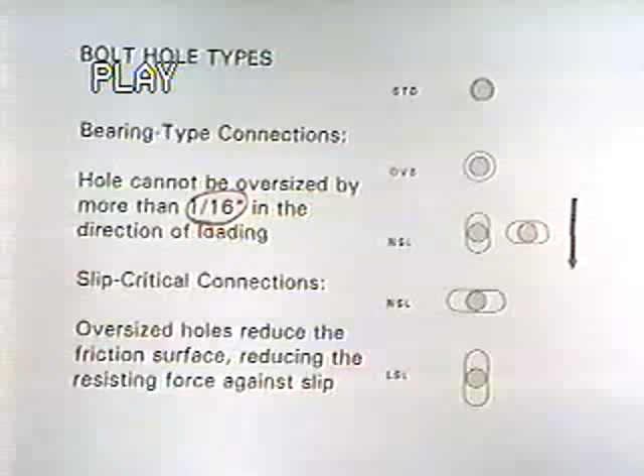In the connection. And so you'll see in the tables that for slip-critical connections, the bolt strengths are given according to the different hole types. Usually what they do is on these problems, they give you standard holes, and you don't have to worry about a lot of this.

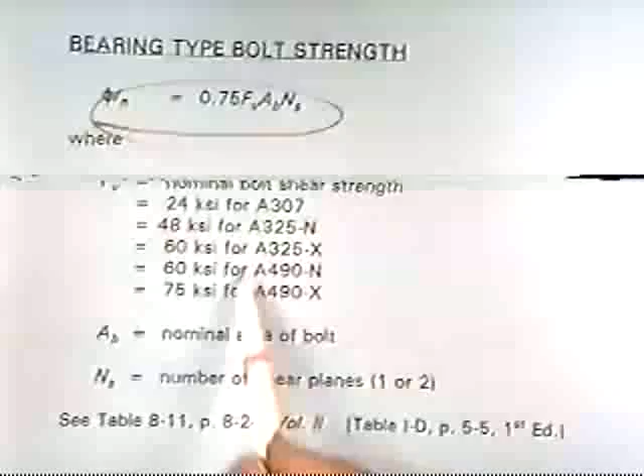The bearing type bolt strength, where we're assuming that we get slippage in the connection, is given by this equation. It's all defined here below. But again, we pick all the values out for the various bolt diameters by a table. And don't waste your time using this equation. Slip critical,

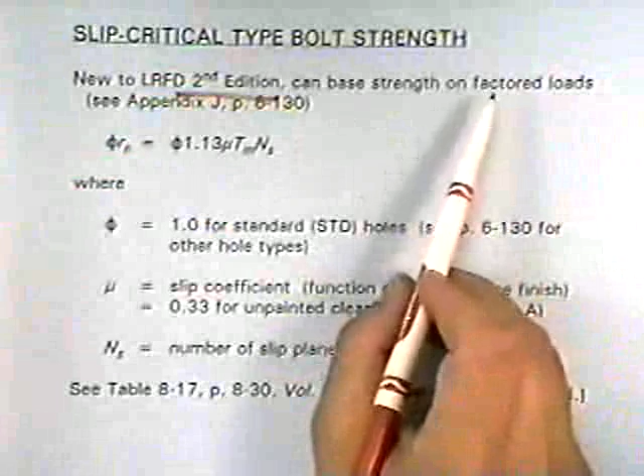it has other tables. What's new in the second edition is the fact that you can now base the design on factored loads. With slip critical bolts, in the past you'd base the design on service loads because that's where you didn't want the slippage. Again, you didn't really care if the joint slipped at the maximum ultimate load. This is the equation to calculate the strength for a single bolt, but again, it's given in a table.

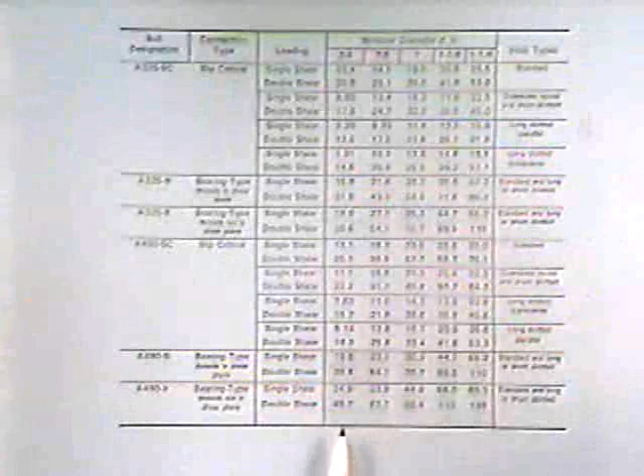On the next page, what I've given you is a table that kind of summarizes a series of tables that are in the specifications. For the second edition of the LRFD specs, it's in volume 2. It's in that second volume. But again, note that for all the values, they have single shear and double shear. And note that the values are just double for the double shear, which would make sense. And here I've given you it for various bolt diameters.

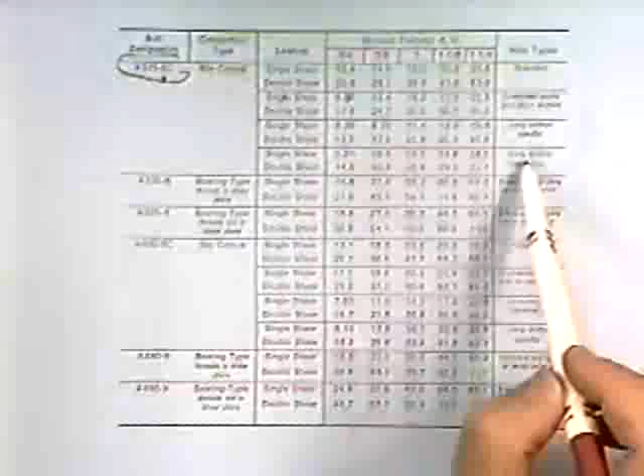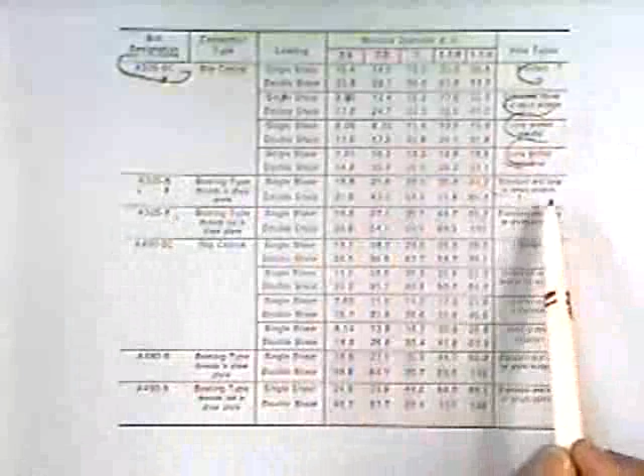Again, note for the slip critical bolts that they give values for the different types of holes that you can have. When you get into the bearing type, the N and X's, then it's just the standard or the short slotted that is perpendicular to the line of action. So they won't let you use the other kinds? Yeah, you can't have

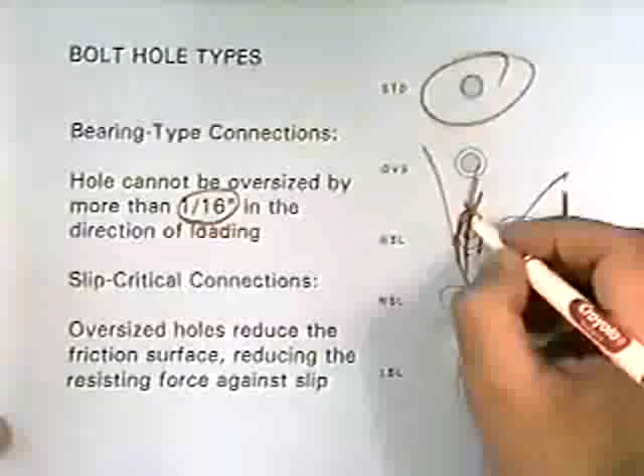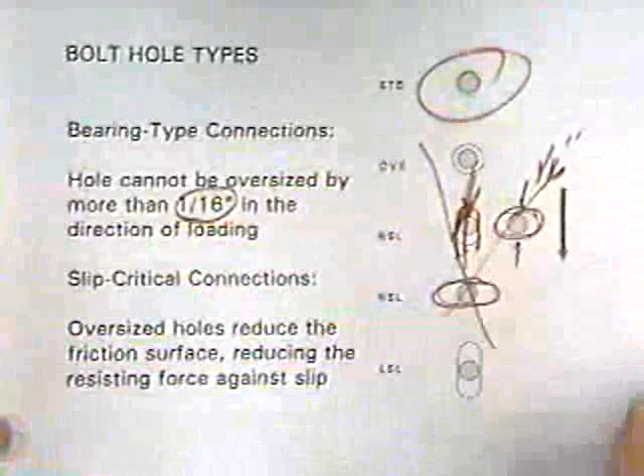going back. You can't have a bolt in bearing with a load that's parallel with the longitudinal axis of the oversized hole, because it's just going to slip right down, or actually the hole slips down right off the bat. Okay, you can only have this or this in bearing, but the oversized can only be a max of a 1/16 of an inch. Whereas in slip critical, because it's getting clamped together, you can have the various orientations of the hole.

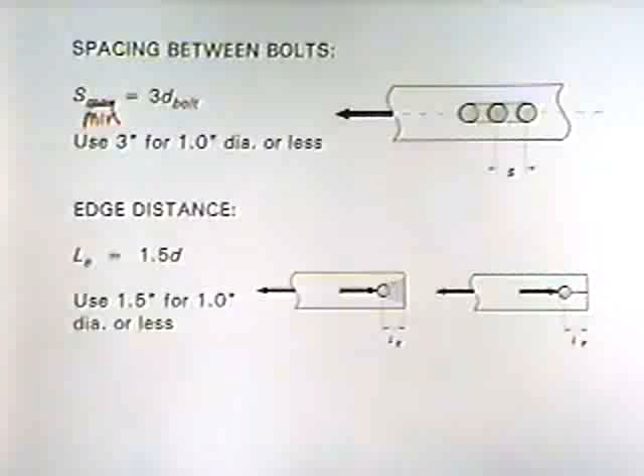You have to watch out for bolt spacing. You don't want the bolts too close together, otherwise they kind of interfere with one another. That should be the minimum bolt spacing. It can't be any closer than 3 times the diameter of the bolt, but typically you use a standard dimension of 3 inches. Edge distance, to keep it from pulling out the edge of the member, 1.5 times the diameter, or 1.5 inches for 1 inch or less diameter bolts.

Now this type of failure, we call it a tear-out failure. Now anybody, I think I see in the front a 3-ring binder notebook. Okay, that failure is similar to taking a page and yanking on it and it tears out. Okay, you know, on notebook pages, we got these little reinforcer tabs, those little donuts that we can put on that will correct the problem. Here we don't have that. You got to make sure you got adequate spacing.

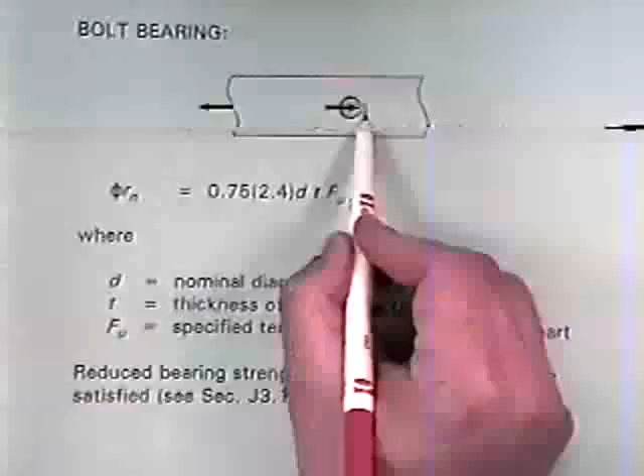Another thing you have to worry about with bearing bolts is the bearing of the bolt against the plate. It'll cause a high compressive force to develop here, and you'll get yielding, and the bolt will begin to plow through the plate. The strength to prevent that is defined by this equation here, where D is the diameter of the bolt, actual diameter. You don't have to add like a 1/16 or an 1/8. T is the thickness of the plate that you're checking. Fu is the ultimate or tensile strength of the plate material.

Looking at an example, let's say we have this simple lap splice where we're lapping two 1/2" by 6" plates together. We're going to use 4 bolts. Okay, because there's only one plane in the connection, the bolts are going to be in single shear. We're going to use A325N bolts with standard holes. They're 7/8 inch diameter. We're using A36 steel.

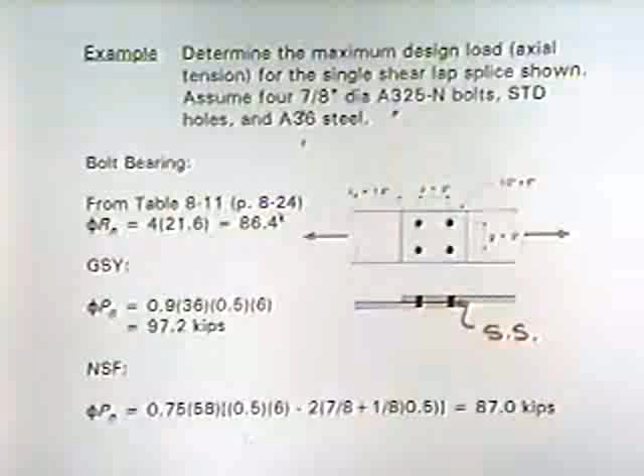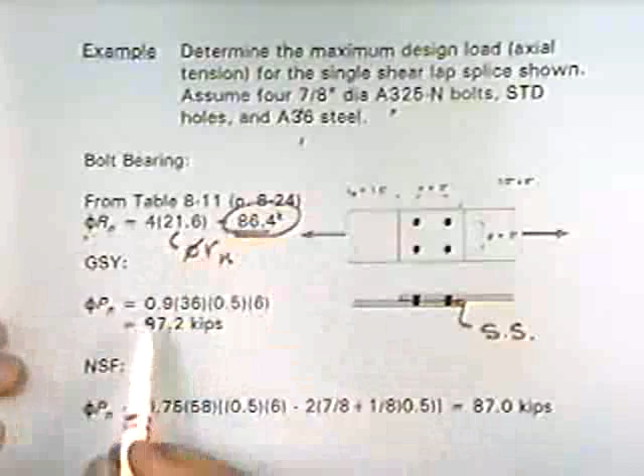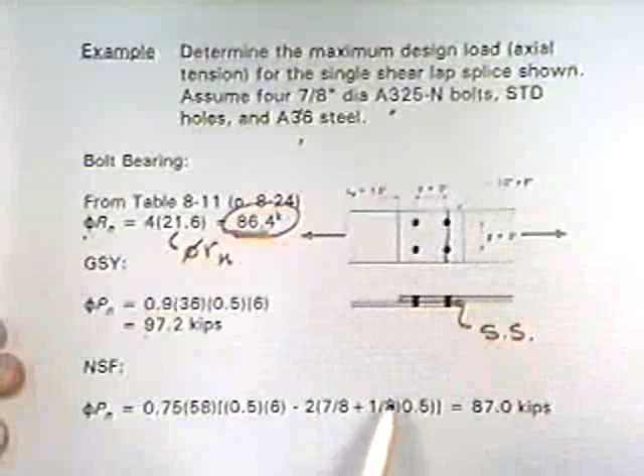Okay, from the table, you can also pick this off the table that I gave you, the strength of a single bolt is 21.6 kips. You have 4 of them, so the total strength of the connection based on the bolts is 86.4 kips. Gross section yielding of the plate, again, it's a tension member. Running through those numbers, which we've seen before, it's 97 kips. Net section fracture, again, what can happen is it can fracture through these 2 bolt holes. Again, like we saw in the tension member section, running through that calculation, it's 87 kips.

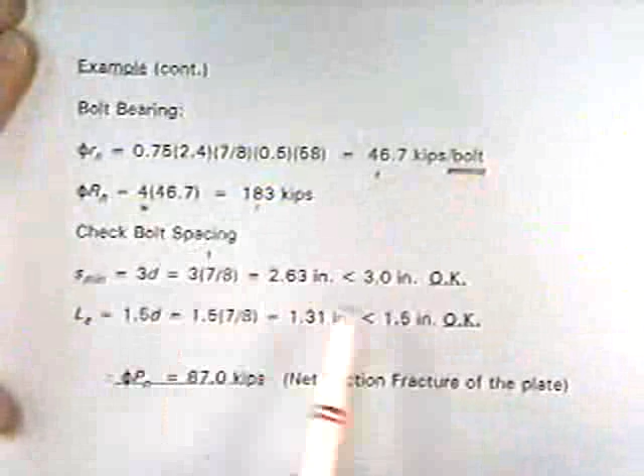Looking at bolt bearing for a single bolt, running through the formula we saw 2 pages previously, it's about 47 kips, but it's per bolt, so we have 4 bolts, so it's 183. Just a quick check on the spacing, everything's adequate there. And so what happens is the lowest value we get from everything we checked is 87 kips, and that was net section fracture of the plate. So that is what controls the design.

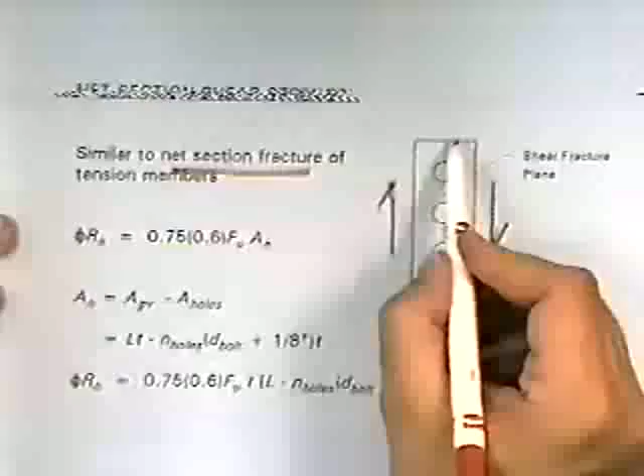When we get into connection design, you'll see that this is similar to block shear that we looked at, but we can also have a net section fracture of a member or connection. And now, because it's shear, the forces are going like this. What happens is that the failure occurs through the bolt holes, but parallel with the shear force. And that's calculated similar to net section fracture, where we take the gross area and deduct out the area of the holes. Typically, you don't have any staggers, so you don't have to worry about that. But, again, then the strength is given by the net area times FU, because it's a fracture, 0.6 because it's shear, and a reduction of 0.75.

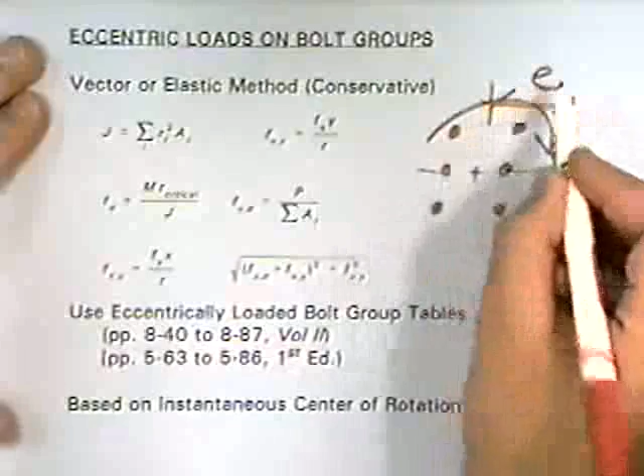Sometimes what happens is that we'll load bolts such that we'll have a bolt pattern or grouping where the force doesn't go through the centroid of the bolt group, and when that happens, not only are the bolts subject to shear, but they're also subject to a torque due to the eccentricity. When that occurs, you can use 2 methods. One is called the vector or elastic method. It turns out to be conservative, but it's not really correct, and it's given by this.

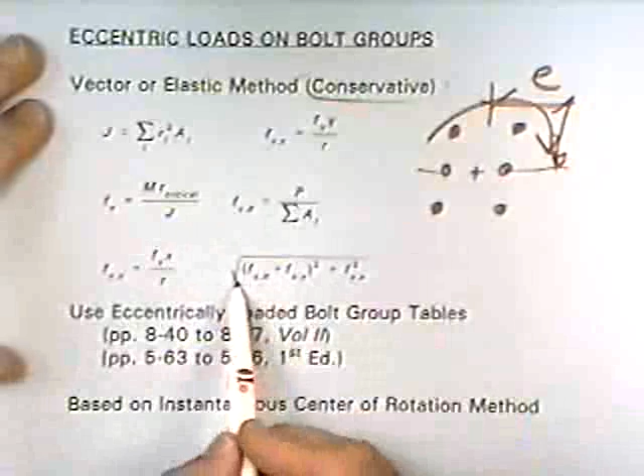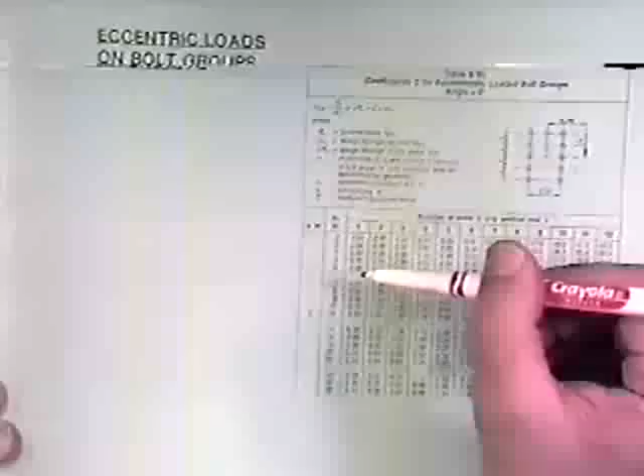You can go into some of the example problems that we set up in those books and look at it. I think you went over something like this previously with Dr. Lowery. They do give you tables, though, that allow you to calculate the strength directly, and I referenced that for both the second and first edition. But it's based on a different method of calculation. I'm not going to show you that, but it's called the instantaneous center of rotation method, and it's actually what happens in the connection. The tables look like this. A little hard to figure out to begin with, but it's easier to look at an example on the next page.

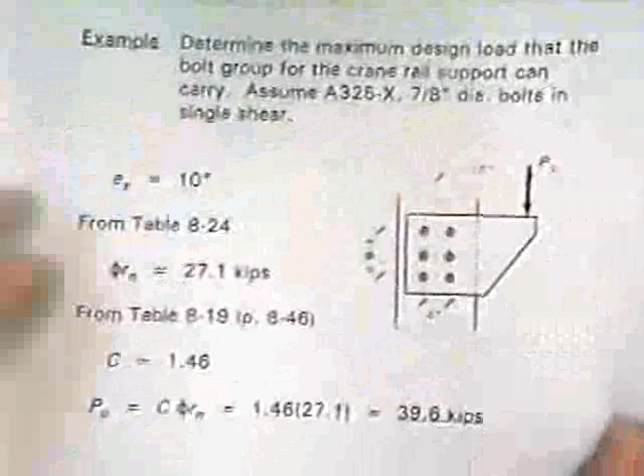Say we have this connection. It'll be typical of some bracket that supports some type of crane rail. Say we've got A325X 7/8 diameter bolts. It's going to be in single shear. We've got 6 bolts arranged like so. Should be equal spacing, although I don't think it is the way it printed out. We want to know what the design capacity is. Okay, from the table, the shear strength of a single bolt is 27.1 kips.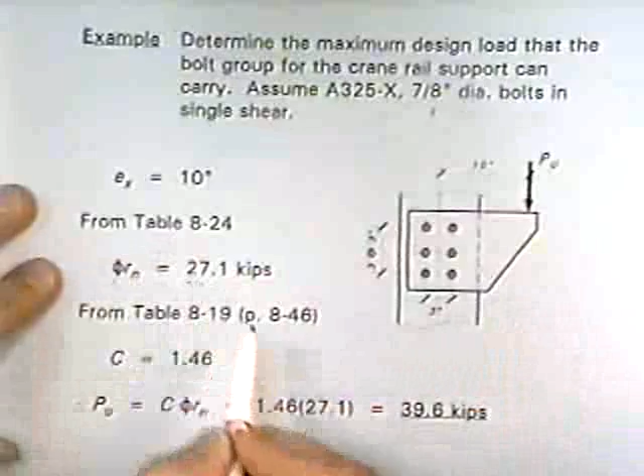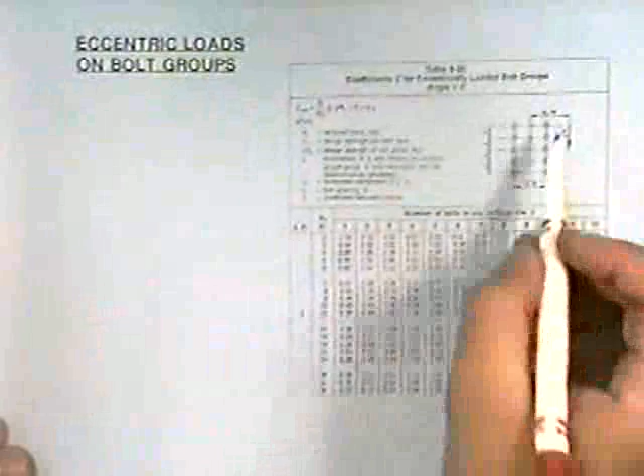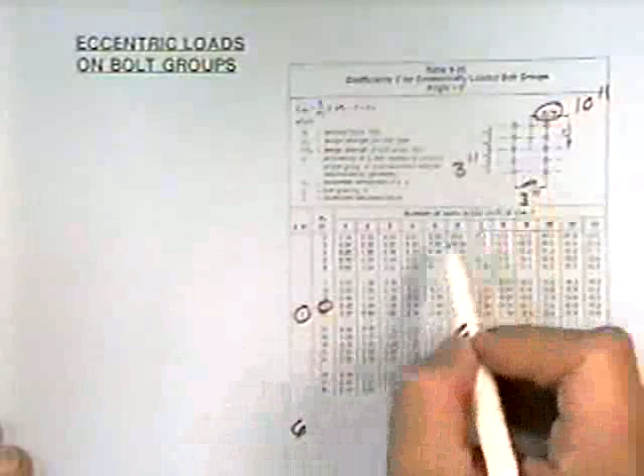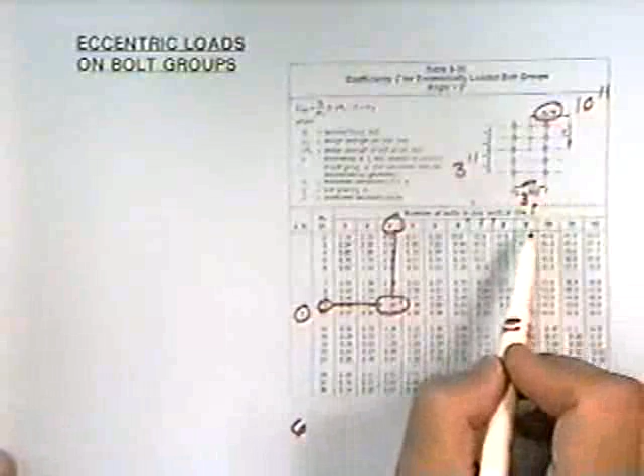But now we go to that table, and there's a series of tables, but we pick out the one that looks closest to our connection. And we need to go in with, by the problem definition, an eccentricity of 10 inches. The spacing between our bolts was 3 inches. Actually, I picked off the wrong one here, so it's not going to work, but we had 3 inches here. What you do is you find your eccentricity, it's 10, the spacing is 3, you also have another group of numbers for a spacing of 6 inches, and then the number of bolts in one vertical row. For our problem we had 3, so you come in and pick off a value. For this table, which is wrong because the spacing between the bolt lines is 5.5, it should have been 3. Maybe did I give you the correct one? Yeah, okay, so you have it.

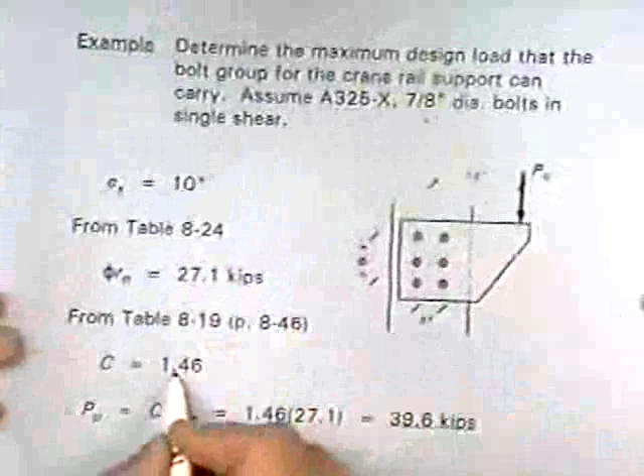Here it's 1.8, but I think on the correct table you come up with a C coefficient that's 1.46. You take that value and multiply it by the strength of a single bolt, so it's about 1.5 times 27.1, which gets you almost about 40 kips to round off. But what the C does is take into account the reduced strength of the bolts because of the eccentric loading. And a way of getting a feel for that is if this force went through the centroid, what would be the resisting force of the bolt group? Anybody know or venture a guess? Well, how would we calculate it?

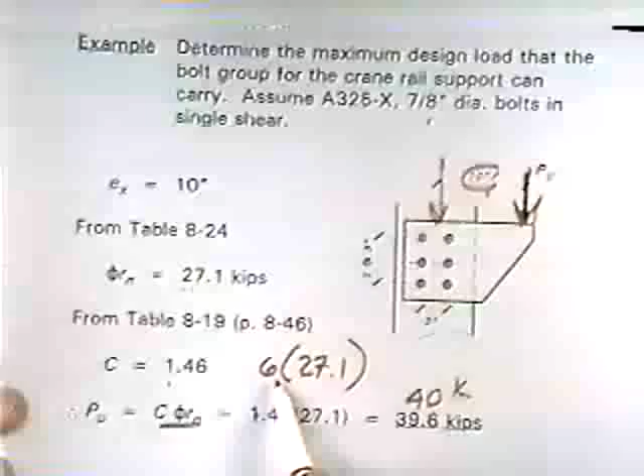It'd be the strength of a single bolt times the number of bolts, because you don't have any moment. There's no moment, so all the bolts are subject to pure shear. So it'd actually be 6 bolts times the 27.1, or the strength of a single bolt. That comes out to be about 175, about 180. Yeah, 175, something like that.

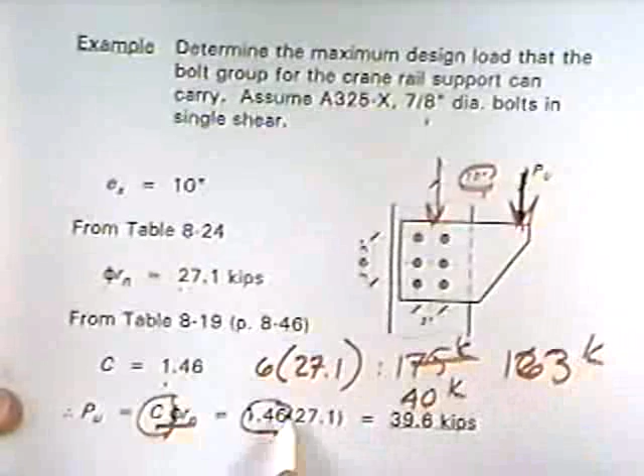What the C value does is take into account the reduction in strength due to the eccentricity. So the C is kind of like the equivalent bolts that you have left over to resist the shear force. That's actually 163 kips. So the torque that's caused by the eccentricity uses up 4.5 bolts, and you only have 1.5 bolts left over to resist the shear force. But again, it's all taken into account by the tables.

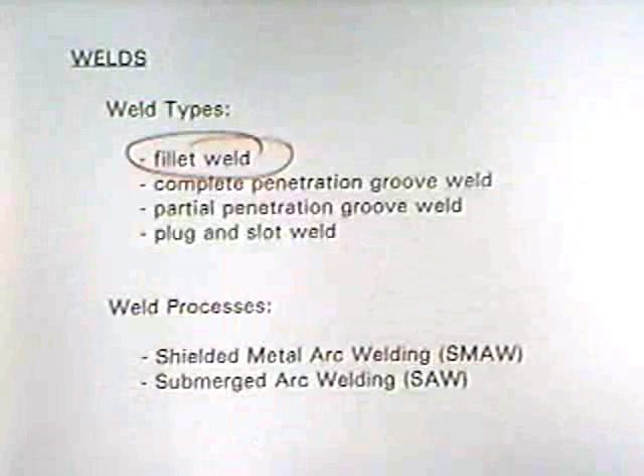Looking at welds quickly, the weld types are fillet welds, partial and full, complete penetration groove welds, plug and slot welds. Typically what you see on these problems are fillet welds. That's what we'll concentrate on. You need to know the welding processes because you can adjust the strength of the fillet weld based on the process. Shielded metal arc welding is the process that you usually see. It's the stick rod that you'll see being done.

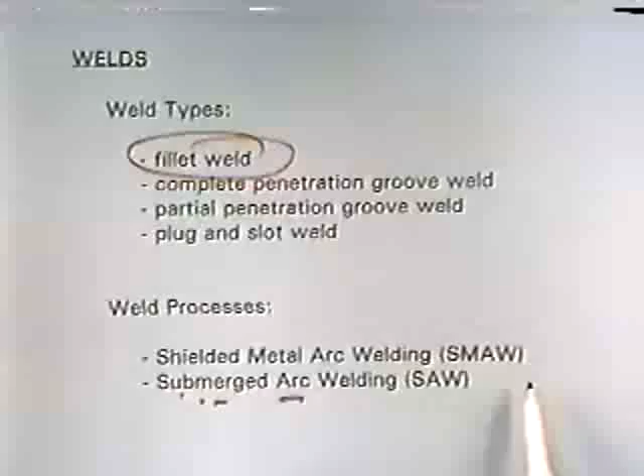Then there's another process that is typically done in a fabricating shop. I believe the textbook we sent up there is wrong. They got these reversed for some reason. In that brown book? Yeah, in that brown book. Well, we'll have to take a look and verify that.

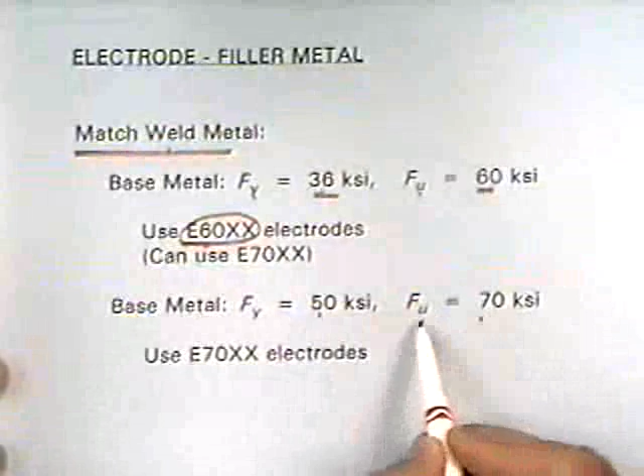What happens when you weld is you deposit weld onto the plates that you're connecting. That's called filler metal, and you need to know the strength of that. Typically you try to match the strength of the weld metal with the base metal. It's called matching weld metal. If the base metal has a yield of 36 or an Fu of about 60 ksi, then you want to use the E60 electrode. If the base is 50 ksi yield or 70 ksi at ultimate, then you use E70. Note that you're matching the tensile strength of the base metal.

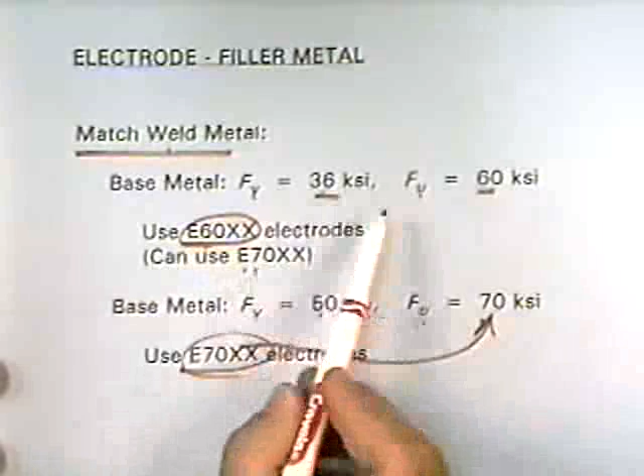In reality, they probably use E70 for both the 36 and 50 grade steel, because it allows them to use the same electrode for both plates, and these are the more common strengths or grades of plates used in construction.

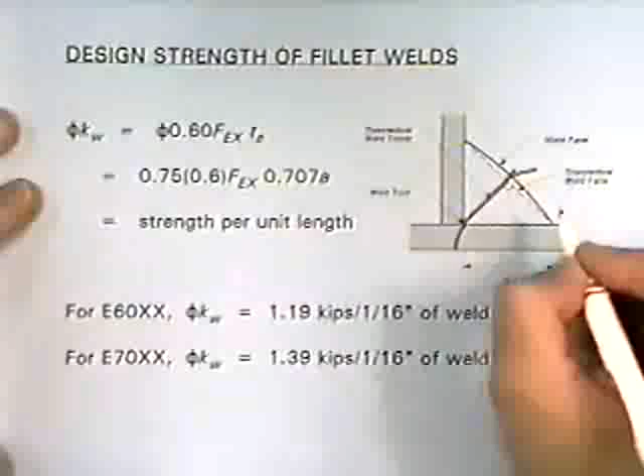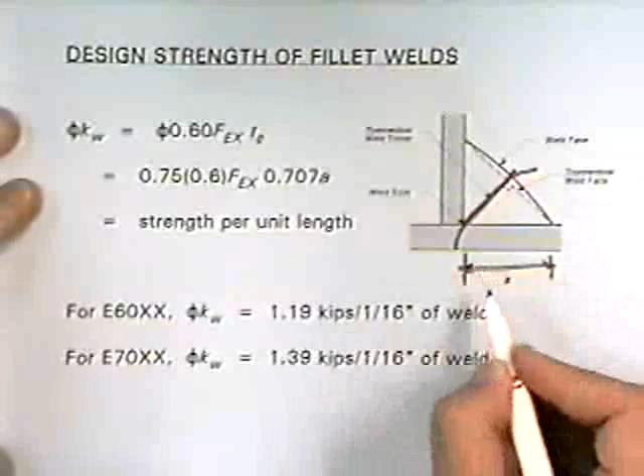The fillet weld strength is derived by calculating the effective area of a weld times the maximum stress that can develop across that effective area. The effective area is given by the effective throat, which is the minimum distance from the root of the weld to the face of the weld. So it's this diagonal distance here. But typically when we size a weld, we specify the leg dimension, because that's what we can actually measure or see. So the effective throat of the weld is 0.707 times A, which is 1 over the square root of 2 times A, cosine 45, or sine 45.

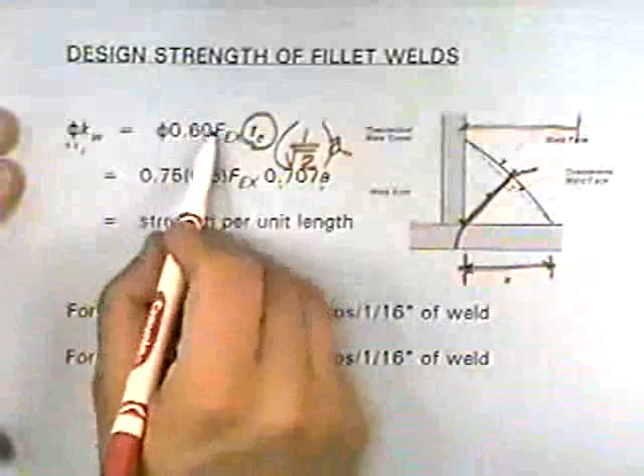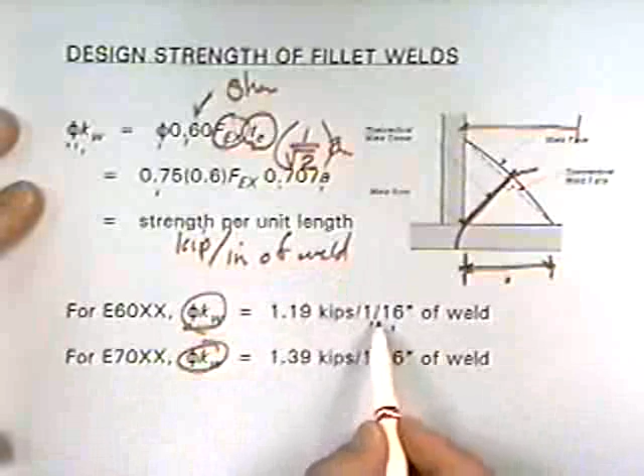Times the maximum stress. What we're going to do is calculate the unit strength, or the strength of the weld per inch of weld. The stress that can develop is the strength of the electrode times 0.6, because it's a shear failure again, times the phi, which is 0.75. This gives us strength in kips per inch of weld, and you can calculate this value for a 1/16 inch weld size, because weld sizes are designated in 16th-inch increments. A real common weld size is 5/16 of an inch, because that's the largest weld size you can put down in one pass. The problem with welding is you have to clean off each subsequent pass, and that takes time and then money.

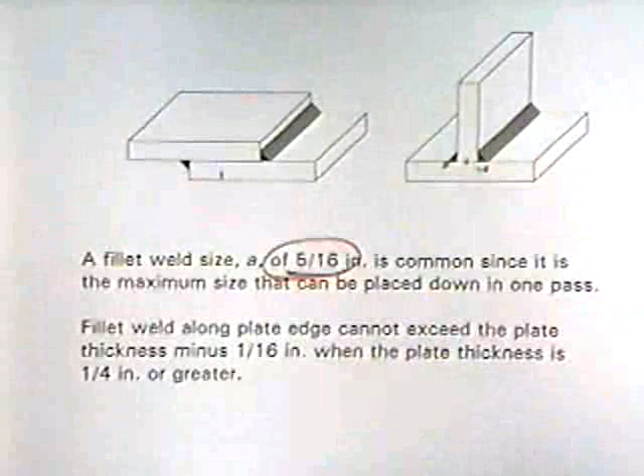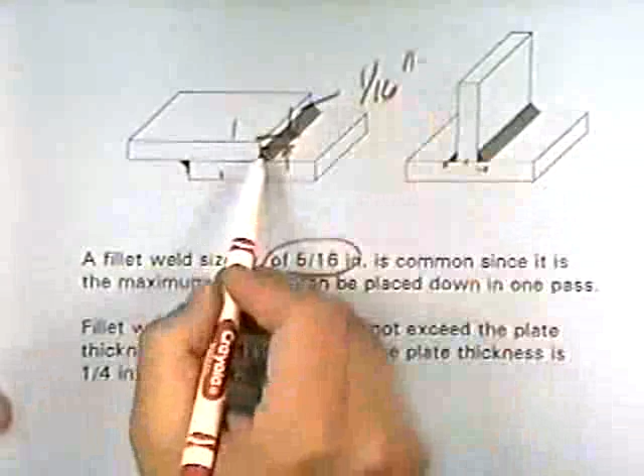Fillet welds are used in lap splices and in corner and T-joints, as you see here. Again, you design with a common size of 5/16. Watch out, if you lap here, the weld size can't be any greater than the thickness of the plate minus 1/16 of an inch. That keeps the welder from burning off the edge, but it is a limitation on the weld size that you need to be aware of.

Okay, I gotta crank things up so we can get out of here in 1 minute. I want to see that.

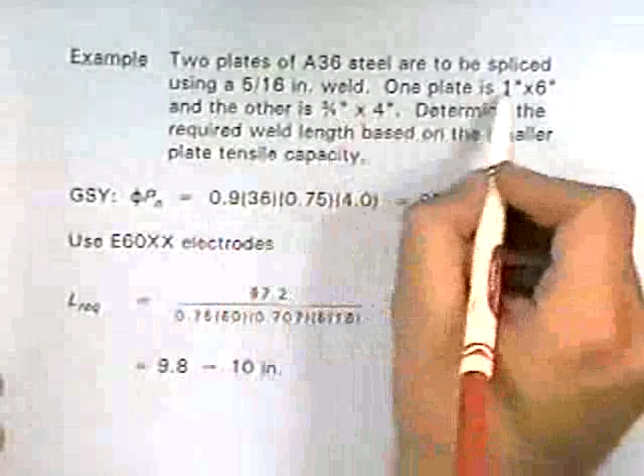But here, this example was an error in your notes. I've corrected it. I had to change it to make it work after I made some of the corrections. I changed the plate from, I think, a 1x8 to a 1x6, and the 1/2 inch by 6 is now 3/4 by 4.

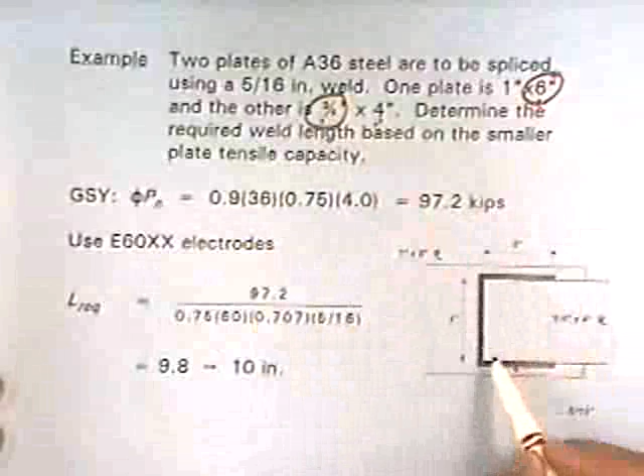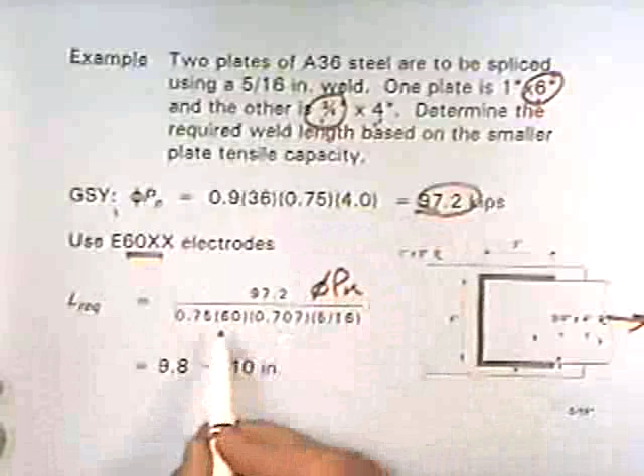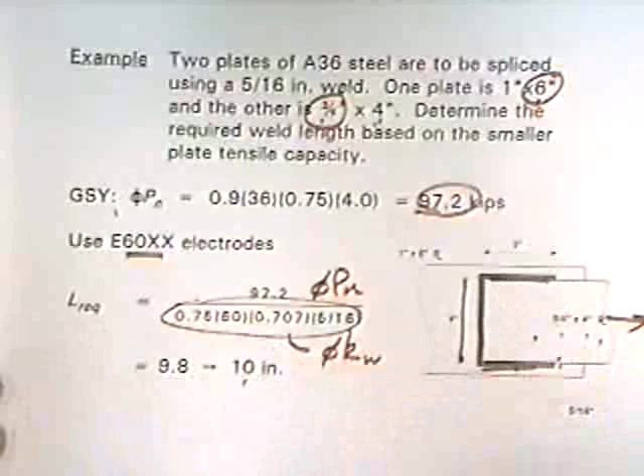You want to design the fillet weld for this plate to carry the maximum load that could occur in this plate. That would be based on gross section yielding, so it's about 97 kips. If we use E60 electrode, we take that design load, phi Pn, divided by the unit strength of the weld, and that will give us the required length. It comes out to be about 10 inches, so we'll put 4 inches here and 3 and 3 on a side, and that balances the design. So it's relatively simple.

Watch out, you can have eccentric loading of weld groups like you do bolts. Again, so you get it all? Yeah. That problem got all messed up when I converted these notes from allowable stress design to LRFD. It kind of got changed halfway.

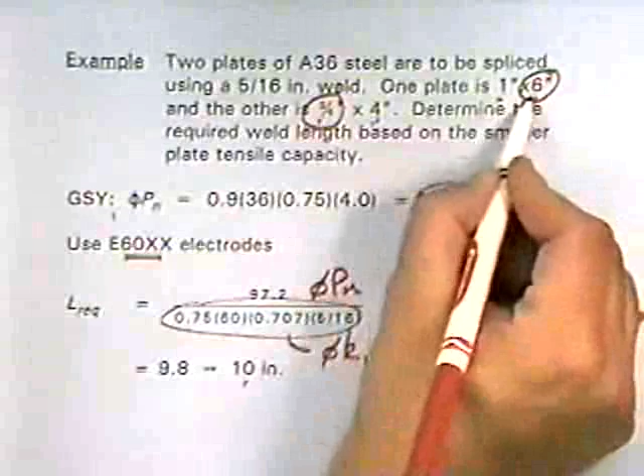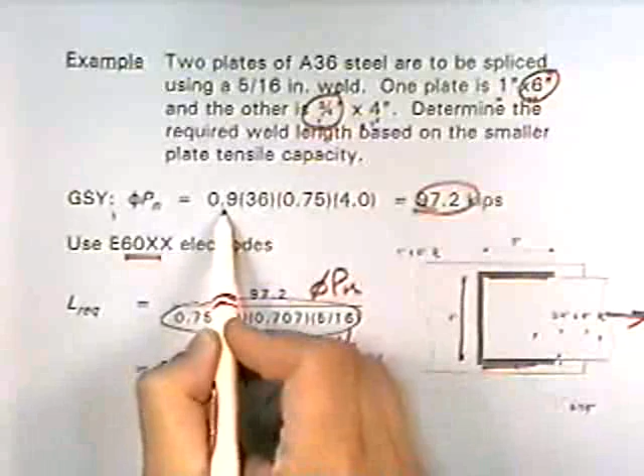So what did you change now? You changed the 6? I think this was 1 by 8, so it's now 1 by 6. This was 1/2 by 6, so it's now 3/4 by 4. And this was wrong. This was like 0.6 or something, because that's allowable stress. So now we're going to the LRFD. It was 0.6, should be 0.9.

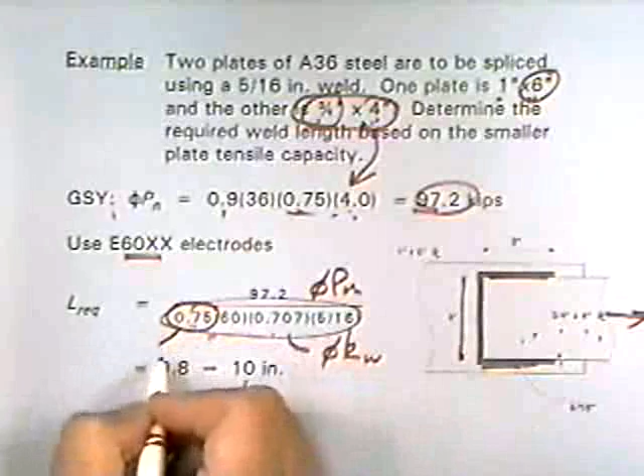I've changed the area of that smaller plate, so it's 0.75 versus 0.5, and it's 4 versus 6. Yeah, these two numbers. This is all right there now. And then that gives you a different value. It's 97, and then I think everything else. No, this was wrong. It should be 0.75. It was 0.3 before, because that's allowable stress. So it goes to 0.75, and that came out to be 16.3, but it's actually 9.8. Quite a difference in allowable stress design, huh? Well, I was mixing the two, so it was actually junk.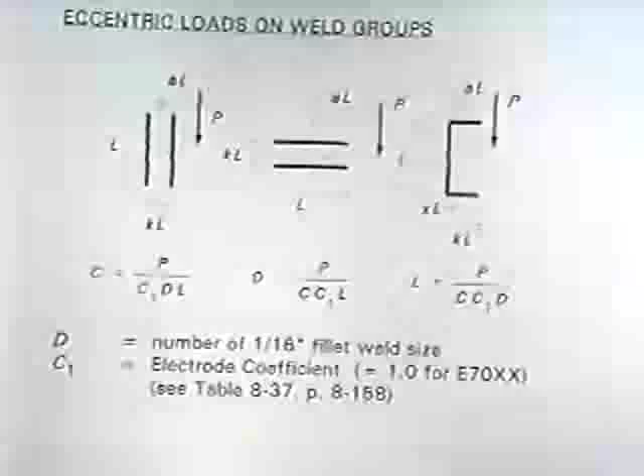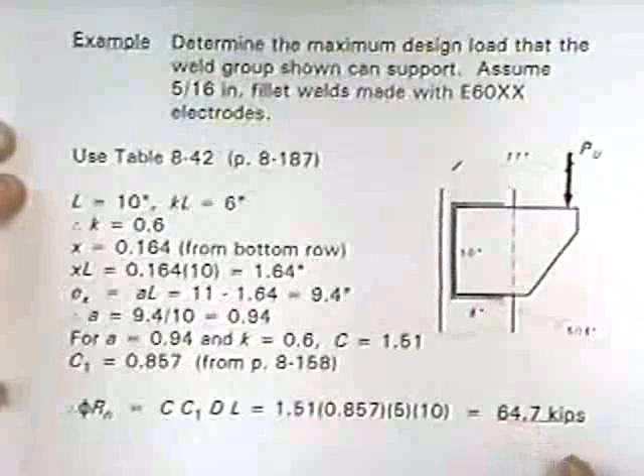Again, the welds can be loaded eccentrically, much like the bolts. There are tables there. I'm not going to go into it in detail. There's the table, similar, although a little more confusing than the bolts. I do give you an example. If you have time, you might go through and look at that. But again, the design's all tabular. It's just a matter of making sure that you enter the table with the correct numbers.

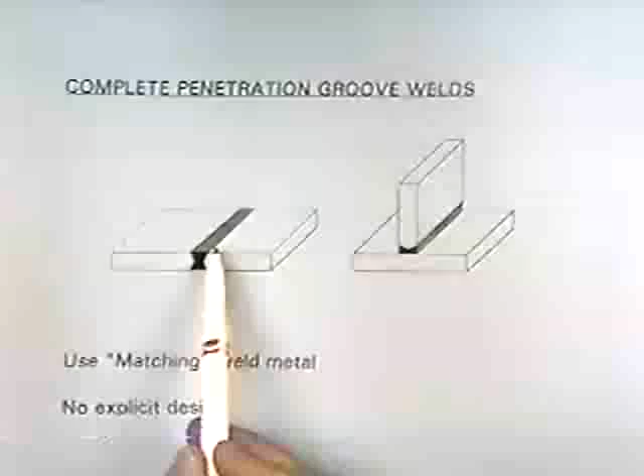Complete penetration groove welds. In a sense, what you're doing is just putting back in the metal that you had to get a full cross section. Consequently, all you've got to do is match the weld metal. There's no design involved with complete or full penetration groove welds.

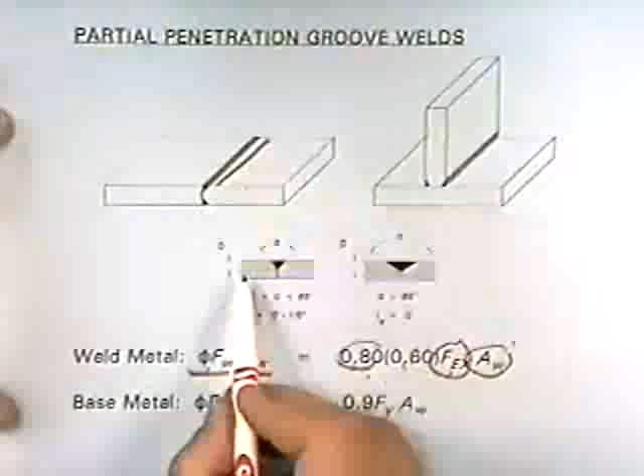In partial penetration groove welds, the strength of the weld may not be equal to the strength of the plate, so you actually have to calculate the strength of the weld. That's given by the strength of the weld metal times its area, and the strength is 0.6 times the electrode strength, E60 or E70. Again, you still assume a shear failure, a phi of 0.8 times the area of the weld, which is the effective depth times the width, and the depth may have to be reduced if the groove angle is narrow, just because you can't get weld metal down to the base of the groove.

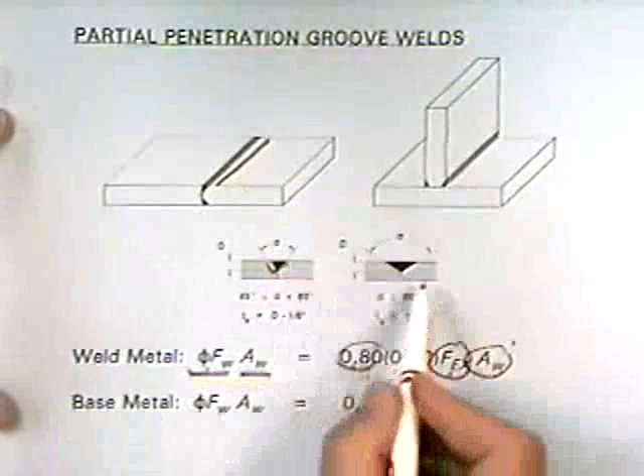What can happen, though, depending upon the strength of the weld metal, is that if the weld metal is real strong, you'll end up tearing out the base metal before you reach the strength of the weld. So you've got to check the base metal strength also, and that's given by this equation here.

Connections, steel connections. We have two types: simple connections where we carry only shear, and moment connections where we carry the shear and moment. Going real quickly again, in a shear connection, a common one would be the double angle connection, where we use two angles and bolt the angles into the web of the beam and into the column, probably the flanges. The way to do connection design is to try to follow the force through the connection step by step, and I've outlined that for you by numbering this exploded view, and in the next page it shows the steps.

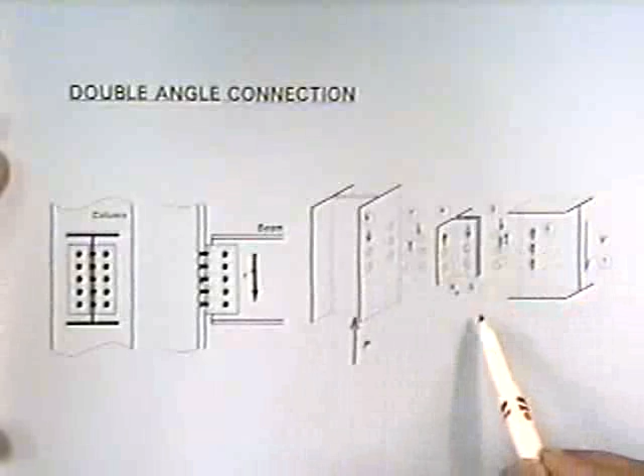They've got tables for everything. They've got the bolted double angle connection tables. They're in the second volume of the second edition, and again it's fairly self-explanatory. As an option to bolting, you can use a fillet weld, usually more economical.

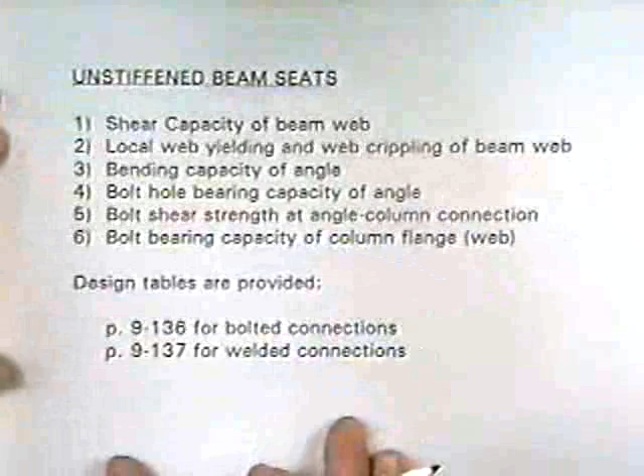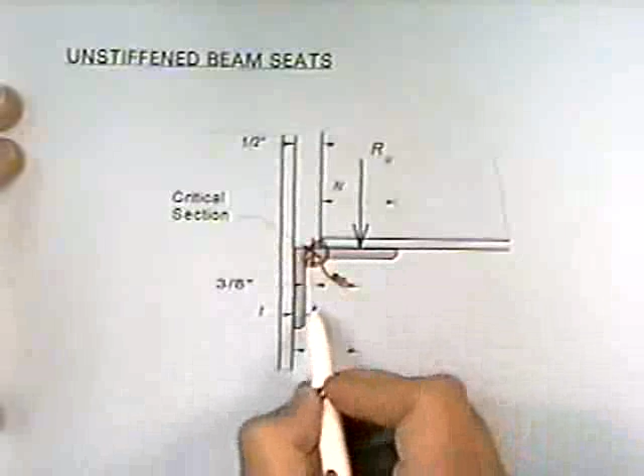Another type of simple connection would be a beam seat. You provide a little ledge or seat, and so exploding it, you can see the steps that you have to go through. They're outlined here accordingly. In the next page, looking at the connection in side view, what it comes down to is sizing the angle, which turns out to be like a cantilever beam, but sizing it so it's thick enough such that you don't exceed the bending capacity right here at the critical section, and the critical section is taken as 3/8 off the inside face of that angle. There's a design procedure that's given in Volume 2. Volume 2 has real good example problems if you get a hold of it.

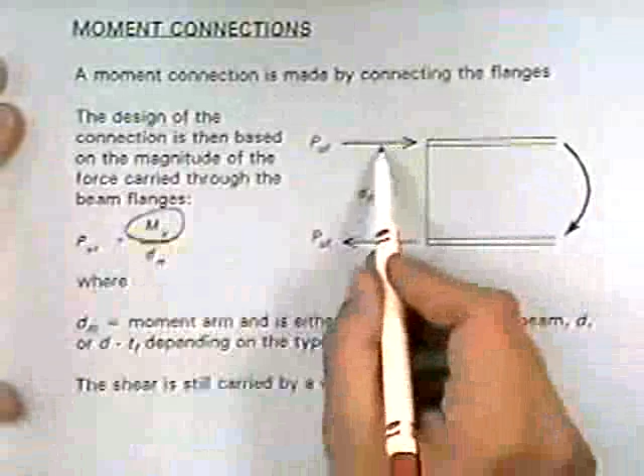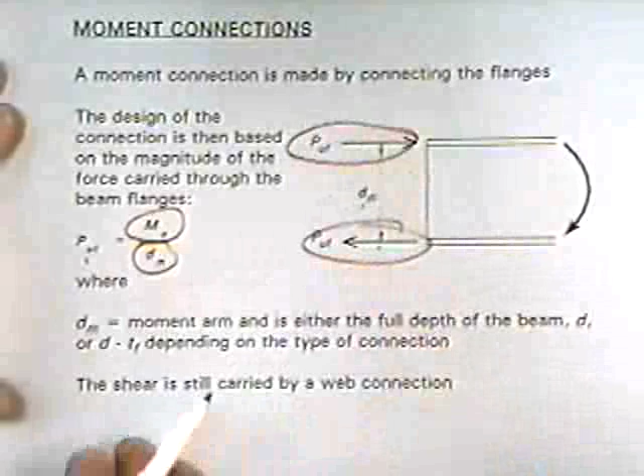In moment connections, again, we're trying to develop moment capacity in the connection. Typically, we're taking the moment that's occurring in the beam and resolving it into a force couple system by taking that moment divided by the moment arm, which we call dm, and coming up with a force which we assume to act at or near the flanges. And so typically the design of the moment connection revolves around resisting these forces here. We still usually have shear in the beam, so we use one of the other connections to carry the shear.

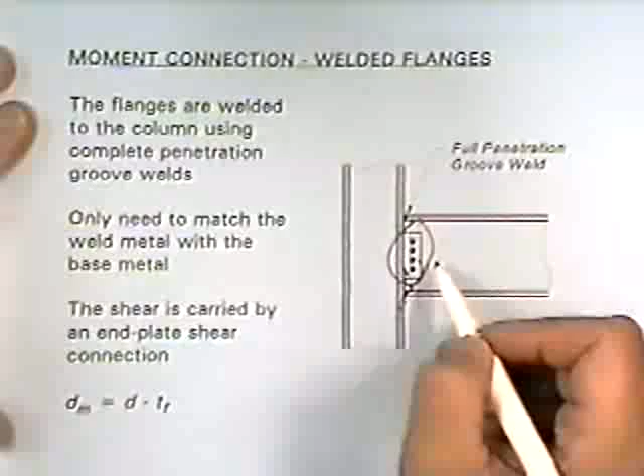A simple connection. A typical moment connection would be as shown on the next page, where we can use full pen groove welds to weld the flange into the flange of the column and then carry the shear through a bolted connection here. It's a real typical standard detail. We used to think it had good resistance in earthquakes, but in the earthquake we got in Northridge last year, a lot of these failed. It was a big shock to the steel industry. Not a problem here, but not good in California anymore.

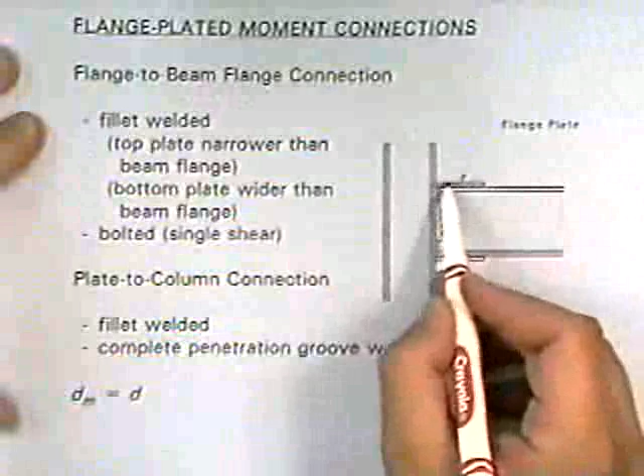Another way of delivering the force that develops due to the moment to the column is to use flange plates that sit on top or below the flanges of the beam, and we either weld or bolt those in and deliver the force out here.

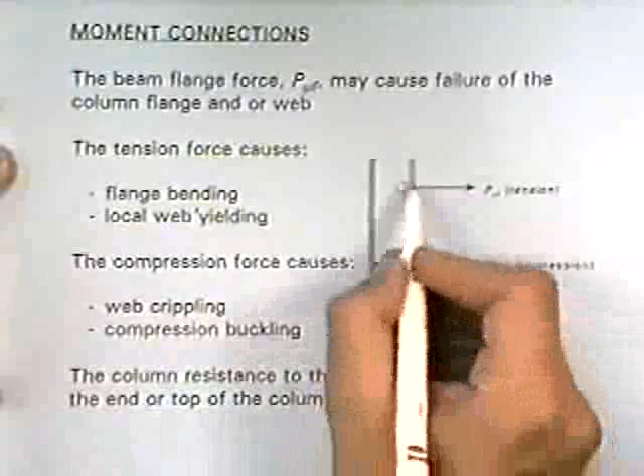The problem with moment connections is that even when we've adequately handled this force or transferred it from the beam to the column, we still have to worry about it as it goes into the column. The tensile force can bend the flanges of the column or end up yielding the web of the column right there, or it can buckle the web of the column or cripple the web of the column right here. So typically what you have to do is add stiffeners here and here to prevent or resist that, and there are procedures for that given in Volume 2.

Now they're plates, they're just stock plates. Simple.

Okay, that completes it for steel. I know I've run over, but any questions on steel? Well, let's see, I missed a little point on page 62. If you plan on doing the steel problems, you need the manual, because you need the section properties, but the manual has real good example problems in there. And just get to know where everything is, because if you get lost, you're going to spend a lot of time flipping through that manual.

I do have a section on timber design. I'm not going to go over that other than to tell you that if you think you want to do timber design, or anybody out there ever do timber design? Sort of, one guy's a timber man. What you're going to have to do is get these manuals. One is the specification, the other one is the supplement. You can't do timber design without these because you need the design values that are in here. You don't have a prayer otherwise of doing it.